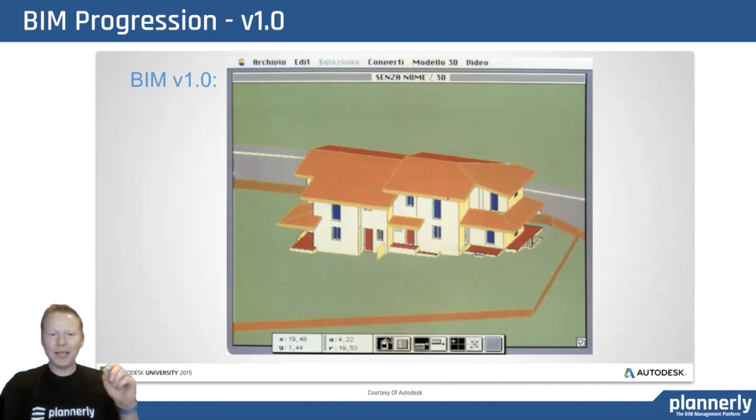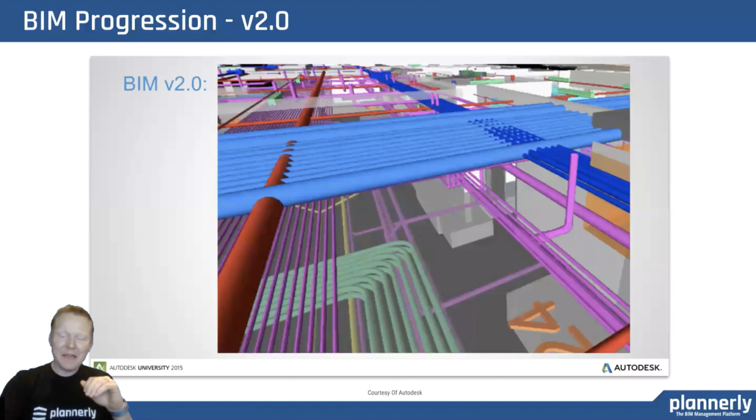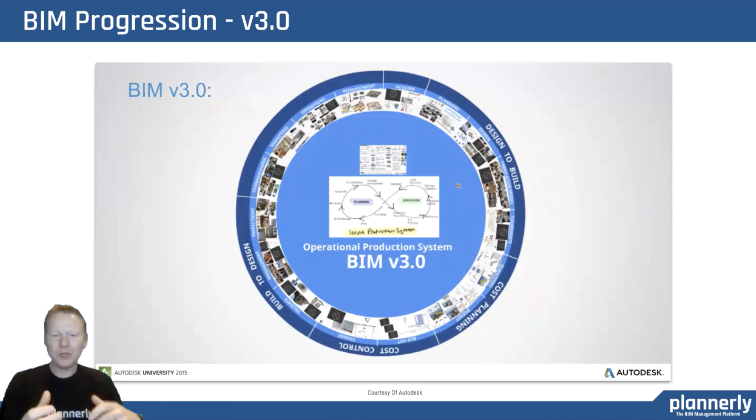In 2014-15, we had a chance, and we presented as part of a team at Autodesk University. One of the parts of that introduction was about BIM version 1.0, where we started by building 3D models, and they were perfect, great 3D models. But version 2.0 was where we were putting these models together and finding issues, finding problems with them. And then more and more people use BIM, and there's more and more uses for BIM. And we come into this 3.0, this era of an operational production system, where there are so many other uses that there has to be a mindful planning process in order to actually get the benefits that people are looking for. So this 1, 2, 3 evolution was a kind of a cool journey.

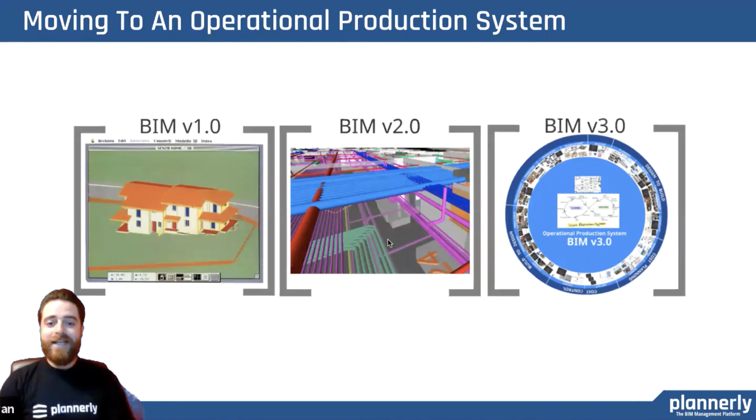Looks good, sounds good. Version 1 was a really great start because it gave a client or someone who can't visually see from a contract or a 2D document what that building might look like when it's actually built. 2.0 was to find it more useful and more collaborative in a sense that we could find more issues. And then 3.0 is where we're getting into all of the metadata, finding a lot of the use for procurement and budgeting and estimating purposes. So this has been a great evolution over time.

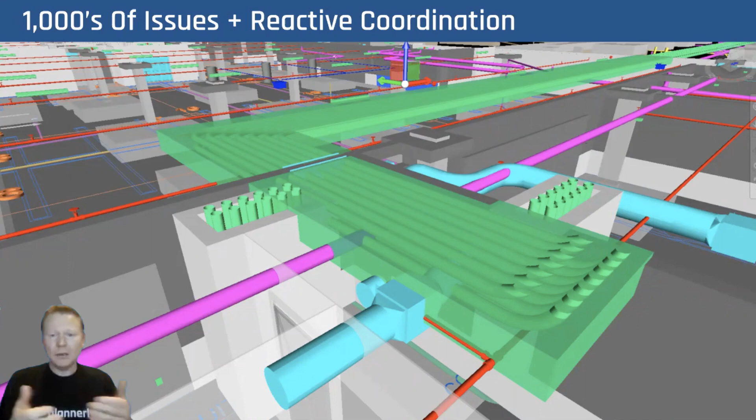But what's happening today? If we look at how all of that has changed, it sounds like a great story, but unfortunately what's happening today is we're still experiencing thousands of issues, clashes, challenges, and mostly a reactive coordination process. If you look at all of the BIM uses, the first one, the most common, is coordination. It's simple because we create models in a vacuum, we put them together, we find out where things are in the same place, and we fix them. It's a great way of doing that in 3D - you can semi-automate it, and it makes it easier to create a list of issues. So we end up with more issues than we used to have, and that's why this 2.0 is still something we need to look at.

Today we still model, and we actually plan for these mistakes. In all other aspects of our lives, when we ask ourselves, what should we do when we make a mistake - should we make that mistake time and time again? No, we definitely should not. We should learn from that. We have great technology to create the models, great technology to combine them, and great technology to list out all of the challenges, the problems in them. And we keep doing that - we keep coming up with lists of thousands of clashes and problems. We wanted to look at what the root cause was, and a few years ago, we got the opportunity to say, why is this?

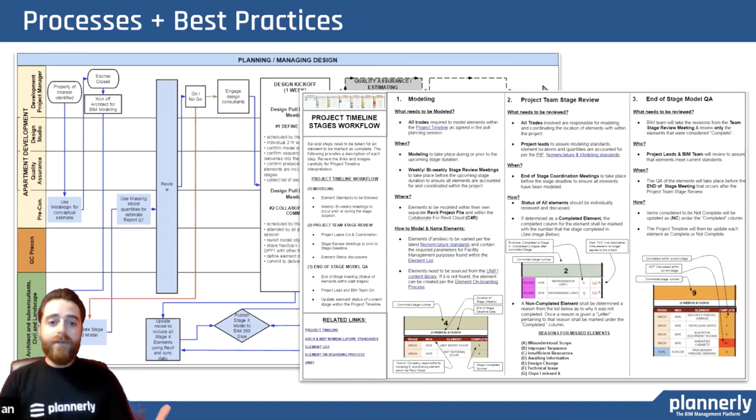Yeah, and we didn't just sit in a basement and do this. We communicated with all of the consultants. We had the architects, the engineers, the contractor, the owner, everybody in the room, but we also went out to the consultants, the designers, the project managers, the subcontractors, just to ask how this process could be efficient, and how it could be improved. Everybody joined and gathered their feedback, and we'd go back to the basement and put all of our notes and feedback together, and we built these processes and best practices. We even built the most optimal workflow timeline for a project, and that was key. It was for the project, not for the design team, not for the contractor, not for the owner. It was the good of the project, and that was a key experience in understanding, always making a decision for the project.

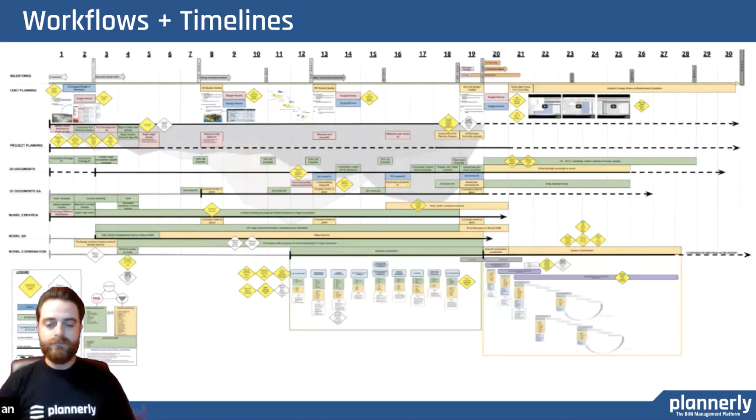But looking at this, is this something that people can understand? Probably not without guidance. So what does this mean in simple terms?

Let's take a look. The first thing we discovered, and it sounds simple now, even looking back at it, is that priority matters. When you look at a building and all of the objects, elements, systems, and components in that building, it really matters the sequence in which you build it virtually, because as we know, it's built in a certain sequence on site as well. And if you don't follow a priority structure, fixing things that don't take priority earlier will cause more issues, more rework, and more pain for that project team. So priority is a really big deal.

Don't you agree, Louis? Yeah, if I was part of the mechanical team and doing the mechanical systems, I knew who to talk to about moving an object, or whether pressurized systems were more flexible or less flexible, and I should communicate some of that with them. So I had some kind of guidance to coordinate these myself and not wait for a coordination meeting to resolve this.

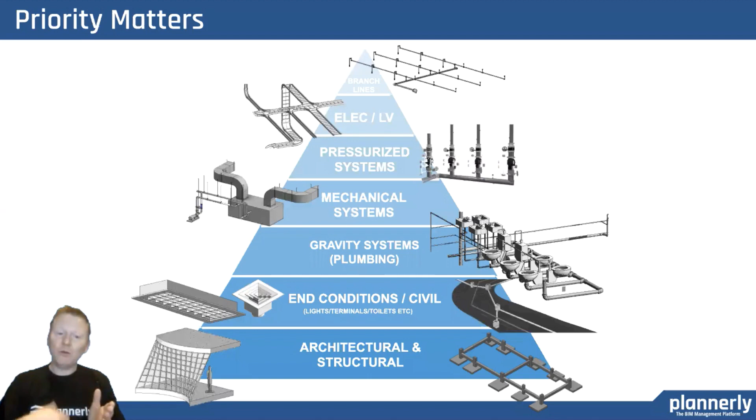And if you sequence those elements correctly inside of that stage, you really stand to benefit as a team. So this concept of priorities, how can you prioritize easily if you stay at 3, 4, 5 major phases in a project?

It's very difficult to prioritize because you've got so much work, it's unmanageable. So what we found was, if we broke the project down into, at that point in time, 17 different stages, it really allows you to have a more focused group, and that focus allows you to prioritize within that stage.

And then also get the benefit by closing out that loop. So the smaller batches help teams to manage the work. The milestones that we defined let us start the right teams at the right stage and understand the sequence inside of that stage, so the output from that stage, the deliverable, had fewer issues.

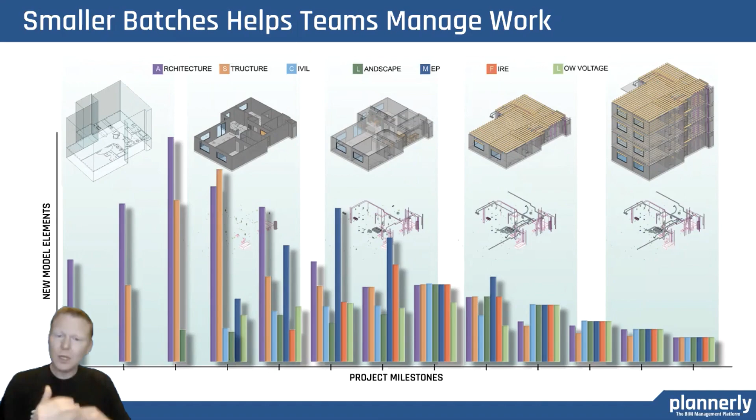Our hypothesis in very simple terms was: if everyone on the project knows and agrees to what they are responsible for, and delivers it at the optimum time, things will be better for the project. Kind of simple.

And we said, how can we test this? How can we actually have a look and test this? Unlike what happens in our industry generally, we don't get the opportunity to put teams from 10 different trades and the owner and the architect and contractor all in the same room, and actually 2 teams.

This was a lab exercise that we ran. Both teams had the opportunity to run each of the exercises. Maybe, Louis, do you want to talk about the exercises, the 2 exercises?

Yeah, absolutely. In both exercises, we gave them 80 minutes. These 2 teams ran the same exercise. So in the first exercise, we followed a traditional phase plan, where they had 10 minutes to plan, 60 minutes to model, and then 10 minutes to fix as many clashes as they'd created.

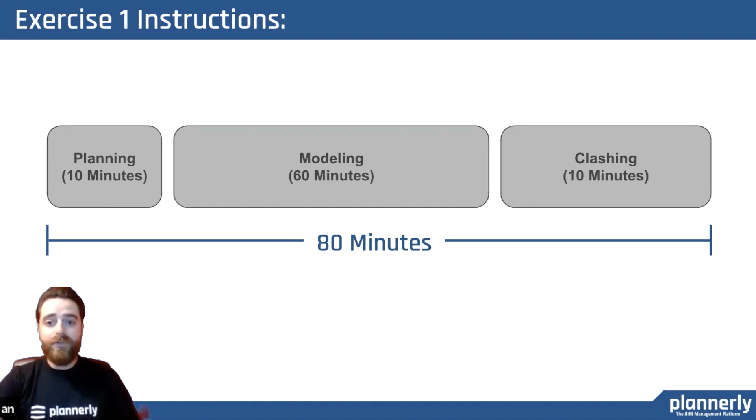What we noticed right away is they didn't even spend that much time planning. They kind of got their design, they knew what they were going to do, they stuck their head in their computer and just ran with it. And then they spent time trying to clash and fix them, but ended up with a lot of clashes.

This was interesting because as an industry, if I wear the plumber's hat or the architect's hat or the mechanical contractor's hat, I know what my scope is. I know, and therefore I can just go.

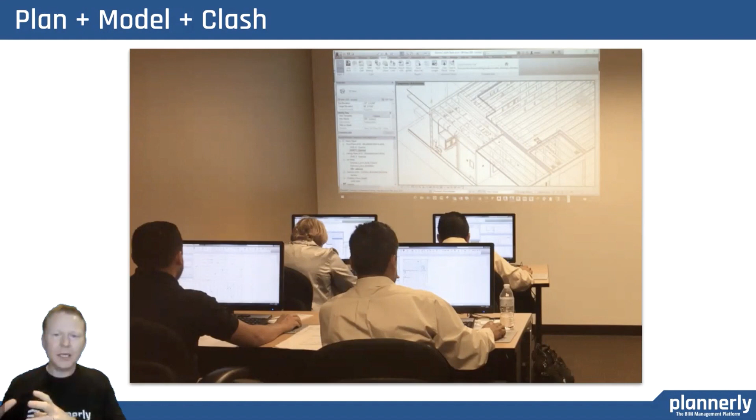As soon as I know what the project type is and I get some input from certain people - and most of the time I'm bugging people, saying can you give me this - what they can do is get on with it and start creating. That's the powerful part of our industry, because there's so much experience in the industry.

One thing I forgot to mention is we did involve every trade. So we had one person from every trade that had experience to model. They came in, we provided them the same architectural design, and they built their own trades, their systems and elements - a list of elements they were supposed to do.

However, in exercise 2, instead of 10 minutes planning, we said spend 20 minutes planning. But we gave them 6 columns, and that represented stages. We said, use those same lists and just prioritize them, and after every stage we're going to synchronize our models and quickly review them before the next stage.

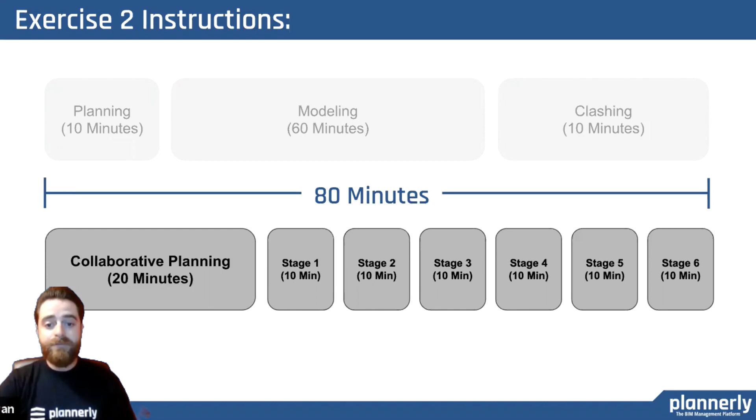The teams right away got up out of their chairs and went to the board and started pull planning backwards based off of their tasks. And we didn't even tell them or guide them or anything like that - we just gave them the board, and they just started to do that.

Instead of taking what they know their scope is and going off to start, they had conversations with each other. They said, well, I'm not going to start modeling my lights until you've set the ceilings, because I know where I want to put my lights. Or, well, we need to know the lights for the layout - so the architect early on has to put just a symbol representing where that is going to be, because obviously there's an impact on other things.

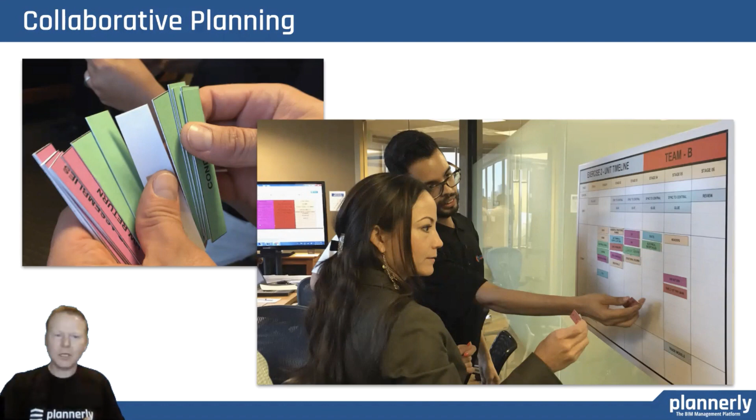So there's a series of conversations that occur that don't naturally occur inside our traditional phase-based approach. Yep, and it was pretty easy.

All we had to do is just say, hey, what is it that you need before you can actually model something, or to make the right decision for you? What is it that you need? And they started talking and discussing and prioritizing items themselves - we didn't even show them a priority structure.

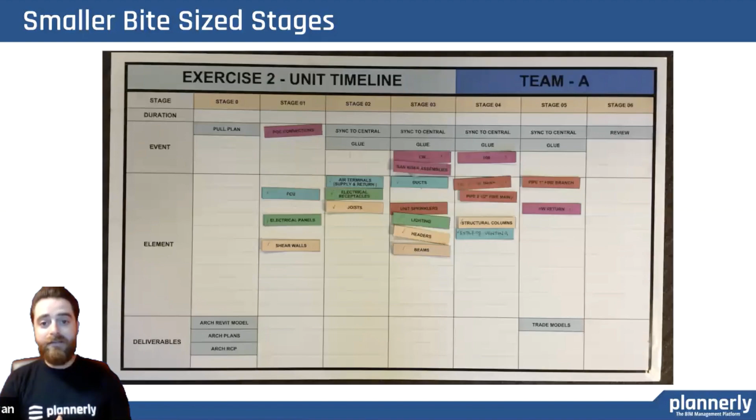They kind of just said, hey, these are the items that are not as flexible, these are the items that are flexible. One observation was that while working within those 10 minutes, they kept talking throughout that 60-minute period instead of it being a quiet room like in the previous exercise. So that was where we said, hey, this is kind of working. Our hypothesis is headed in the right direction.

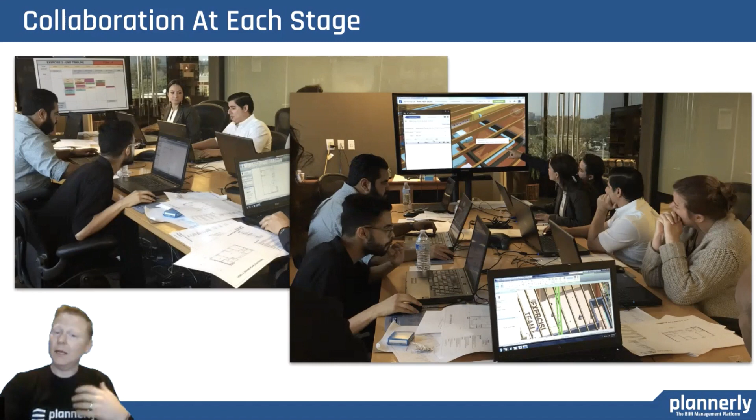Understanding what the other teams are doing suddenly made what they were doing so much more powerful for the project and for all of those other team members. So there's this give and get, exchanges of information required at different stages. They had their conversations really early, set them out in that plan, and then went about following it per stage. The results were pretty amazing.

In exercise 1, their average issues were 235 issues, so clashes - elements that took up the same space, or just wouldn't have been worked out. This is just from the report of us clashing, using a tool to clash. In exercise 2, there were only 63 issues, and they still had the time to come in and reduce that number.

It was the same 80-minute period. All they did was spend 20 minutes planning with a little bit of guidance, and that was huge in their eyes. So this led us to the next chapter in our agenda: how to get to 53% fewer clashes. That said 73%. Right, 73%. Why can we only get 53?

The 73% was from the test. 53% was from actual real projects that we took this process and implemented inside of - on 2 projects. That's pretty good. I'd be happy with 53%.

So our thesis on this project, as we went into it, was large batches cause information buildup. That buildup is the cause of issues. Misunderstandings are usually the root cause of that issue, and more focused stages with smaller batches would produce focused, better results. So that was our thesis going in.

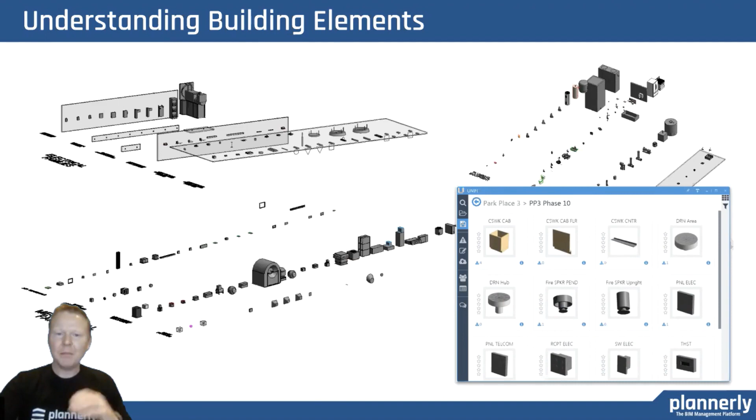So it makes sense for us to have this library of building blocks that we would start with, and people would understand whether they are generic - unless you're an owner that repeats the work, like Starbucks, or a company that always does similar things, Amazon with a data center, where you might have a series of repeating objects. But in a traditional process, or the rest of the world, you need a set of generic elements to start with that can get swapped out later. Understanding what you're starting with is incredibly important.

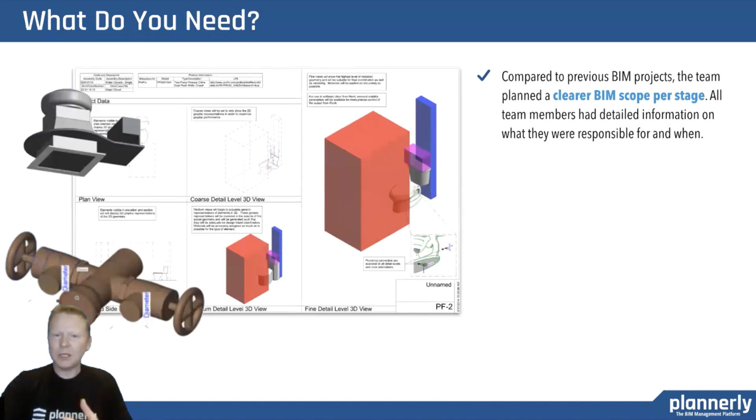And then being able to have that clearer scope - not just that an element might be required, but does it need clearances? Does it need connection? Does it need additional information? Who is required at what point in time to put that in? Really going into that detail is incredibly important for that plan so people can understand it.

Then we looked at how to have a multi-party agreement when this happens, and we traditionally follow a very closed-door environment. What we end up seeing is people have disagreements. So mutual agreement actually happens very often when you have two parties in the same place.

So we had a lot of pull planning, and in this environment we can't expect everyone to be in the same place, but using online tools and online methods to replicate that same process is very powerful to get agreement as you have handoff of information and responsibility for an element at the optimum time.

One of the things I see being more successful is when you involve every team to make that agreement, to make that plan. It becomes more of their responsibility because they said they would. When it's more mandated, like a contract saying here's the timeline, there's a negative or step-back reaction to it. So having them involved and feeling part of the plan, even if it's just asking what they think we should do on this project, gives them real engagement—they feel like it's something we can build together.

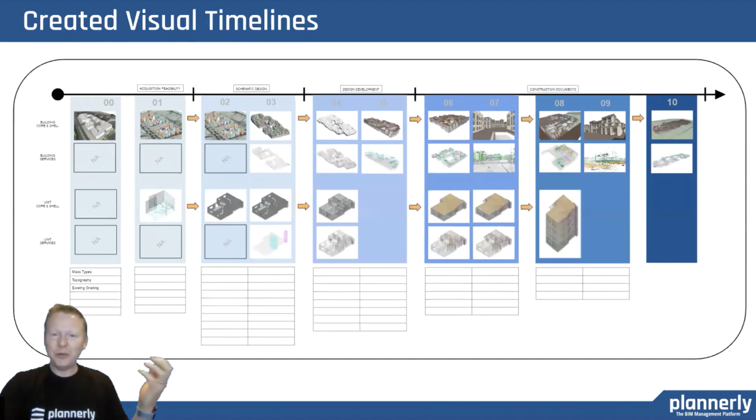And then making it visual was very powerful, because understanding somebody else's scope is really difficult if it's just a word or abbreviation they use, since I don't speak that language every day. But seeing the element, the object—we walk around buildings every day and see these objects in exposed ceilings that we haven't really known who's responsible for—now it's an object we can see. That visual nature was really powerful.

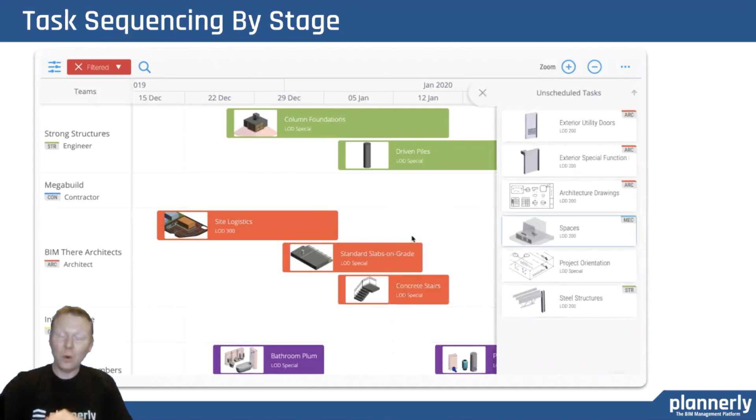And being able to have teams sequence these activities so that inside one stage they know exactly what the order is going to be, and have notifications of when they should start their work, really allows people to be a lot more focused on what's important for the project and not create work that needs to be reworked later. As a result, we end up with fewer issues.

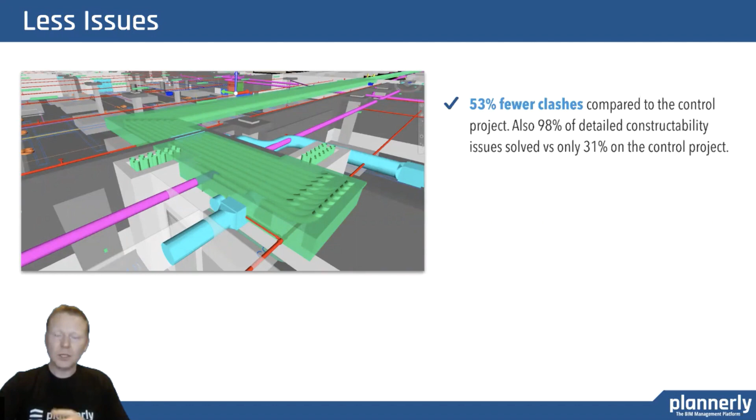In the case we had, 98% of the constructability issues were actually solved as they went through—not just clashes, but constructability issues too. We had project managers, architects, designers, engineers, not just decision makers but also the people actually doing the work, modeling and designing, fully aware of how the timeline was built. That really got everyone to trust each other. In the end, not only did they have a lot fewer issues, but they saved two months on a 12-month design schedule, which was pretty cool.

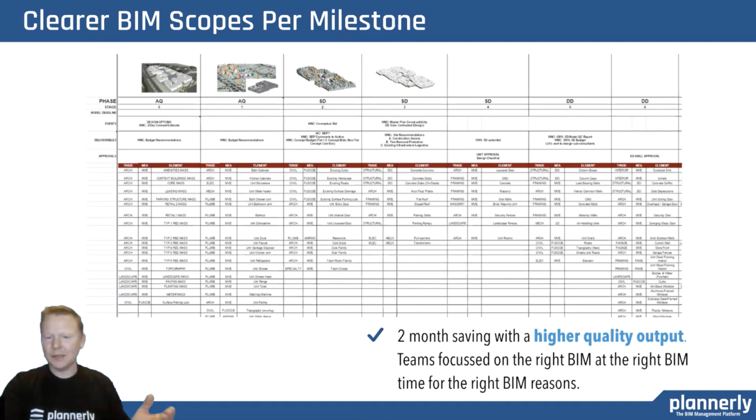Clearer scope, smaller chunks of work, and an output that was quicker and better. You end up with happier teams because you're using more effective, more focused work and creating better outputs.

So in conclusion, if everyone can agree in a collaborative way on what they need to do and why, for the good of the project, life will be good for everyone. But the problem is this is an extremely difficult task—so challenging for industries used to being traditionally contracted and focused on scope and getting output to get paid, versus having more collaborative planning focused on the good of the project and eliminating waste. We realized it's not just the tools, it's the process and the workflow.

And the future we see for BIM is the combination of tools and processes that enable teams to have more optimum outcomes, less waste, more efficient processes.

If you're trying to take on this task, don't feel overwhelmed. Don't think, if you're someone trying to implement this, that it's something you can't do.